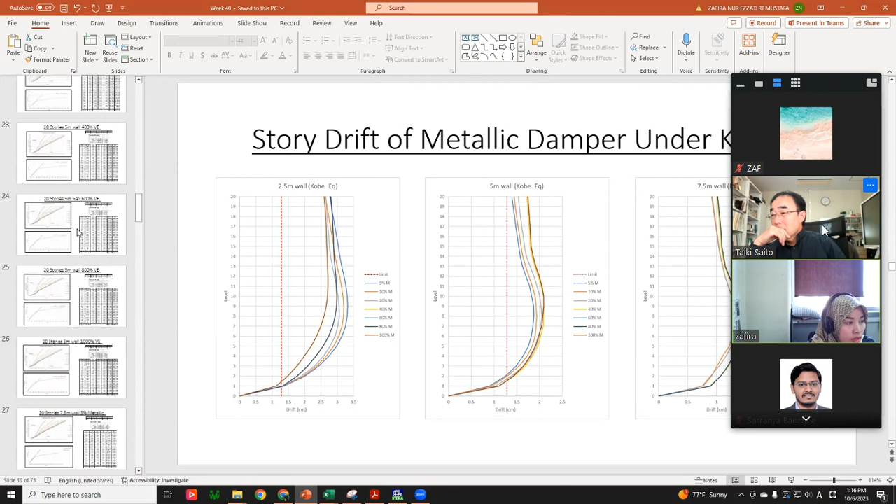Even comparing with the time history analysis here under Kobe, basically the 2.5 meter wall doesn't fit with the criteria we target. This is 2.5 meter, this is 5 meter, and this is 7.5 meter wall. The 5 meter is a moderate performance. Checking the 5 meter wall, for metallic damper it still doesn't fit the target, even at 100%, even at 5% metallic.

We can see the metallic doesn't dissipate much energy compared to viscoelastic. Viscoelastic can dissipate more energy, for example 20%, like 18%. But it also depends, because this is 20 stories, much more taller, and the length of the wall also influences the design. For a 20-story building, 7.5 meter is much better for the structure wall. With 7.5 meter wall and 20% viscoelastic, the energy starts from 10% for equivalent damping, and when we go to 40% it works much better.

Okay, could you show me 5% first? 5% under metallic, this one. This is the shorter wall.

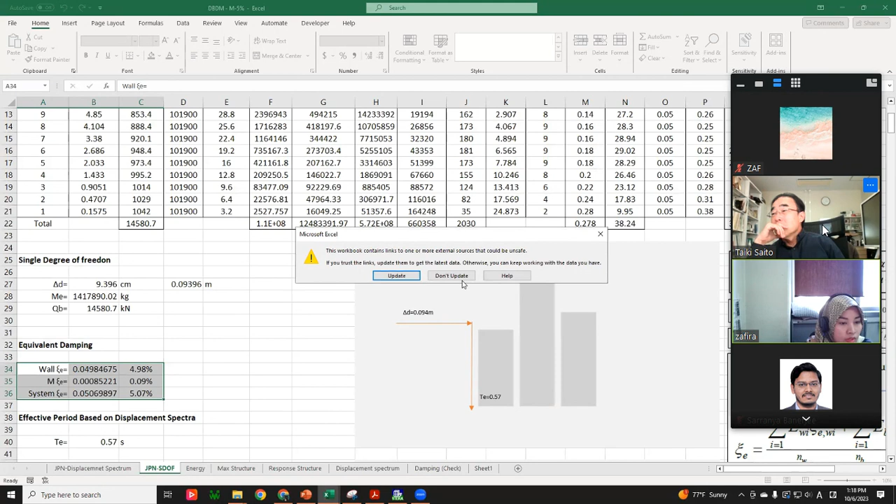Let me open the Excel for the 20 story case. From here we have the target displacement, and this is our equivalent damping. From the target displacement we can get our effective period based on the equivalent damping. Here is 5%, and our equivalent damping is around 0.57... equivalent damping is 5%. Yes, but this is the 5% line, so then we can get the effective period of 0.57 second, which is here.

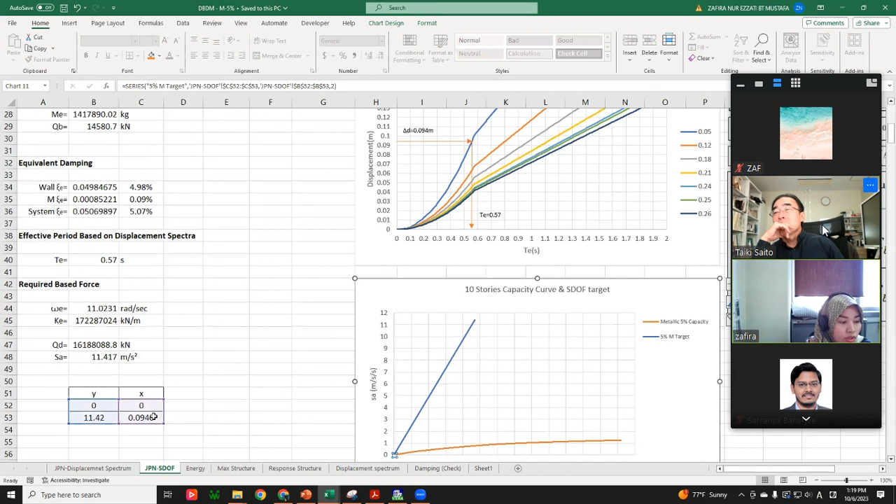It will automatically calculate for this line. This SD is our target displacement, and SA is our target acceleration. So if you want to go down this line, what you can do is increase damping, or increase capacity. Either of these two.

So this is a case where the coupling beam is very weak, only 5%. So it's a very weak coupling beam, and also a very weak wall, 2.5 meter length.

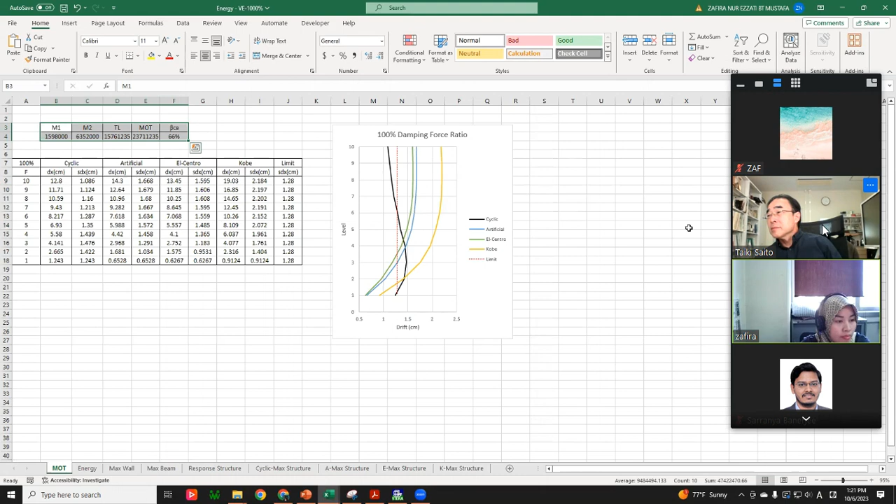How about 7.5 meter length? Any change in the line for 7.5 meter on the 5% metallic damper? The capacity is much more higher, because the wall is larger than before.

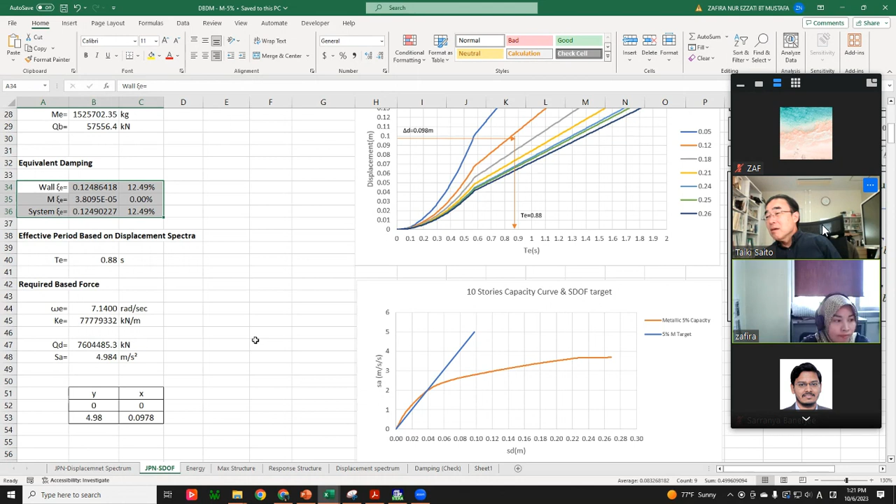Okay, and also damping is not 5%, damping is now 12%. But metallic is small, because if you can see here, the beam energy is very small compared to the wall. That's why the damping for the beam is big because it's 5% and it dissipates energy, but the coupling beam is very small and doesn't have enough capacity, and the total energy release is small compared to the wall. That's why the percentage of equivalent damping is small here.

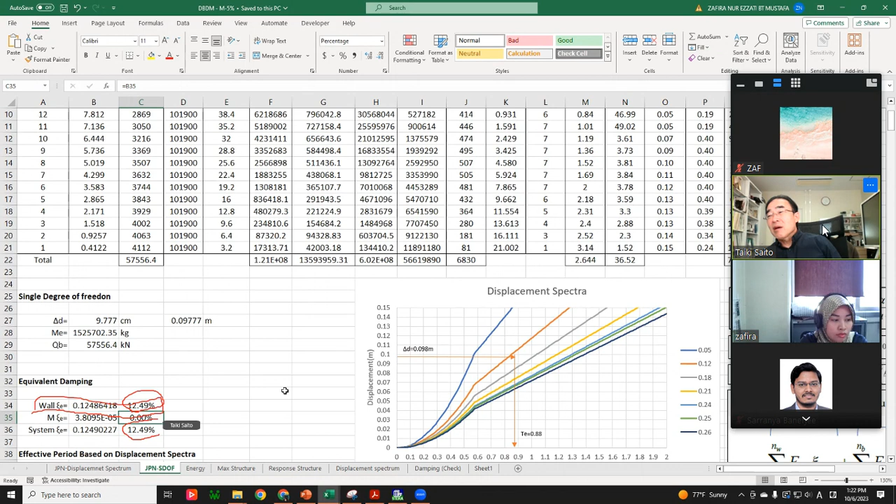But this damping is almost... so wall equivalent damping means the wall is getting damaged, right? Here is the ductility, sensei, it's still less than 5. The lower part is more than 1.

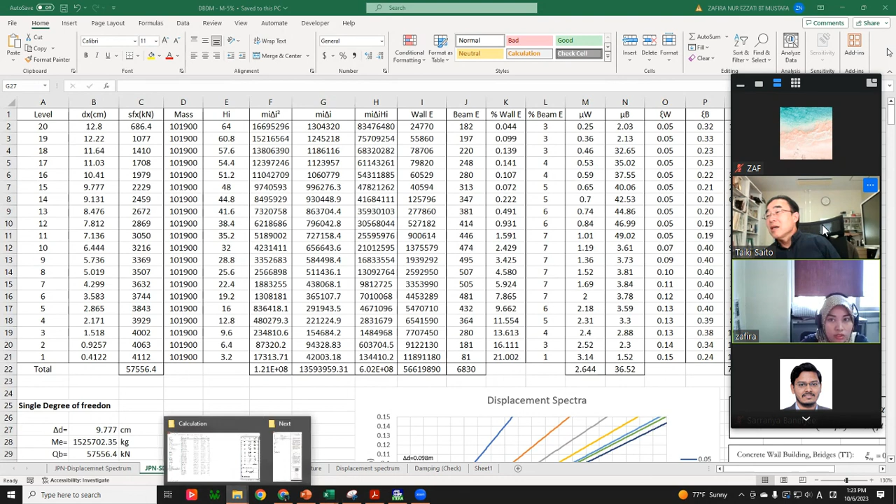Could you show me the 5 meter case? Okay, you can close this one. How much ductility factor for the column? For the wall.

So the ductility is almost no damage, but the coupling beam has so much damage, especially at the upper floor, the middle floor. But the total damping is only 5%, and a little bit for metallic.

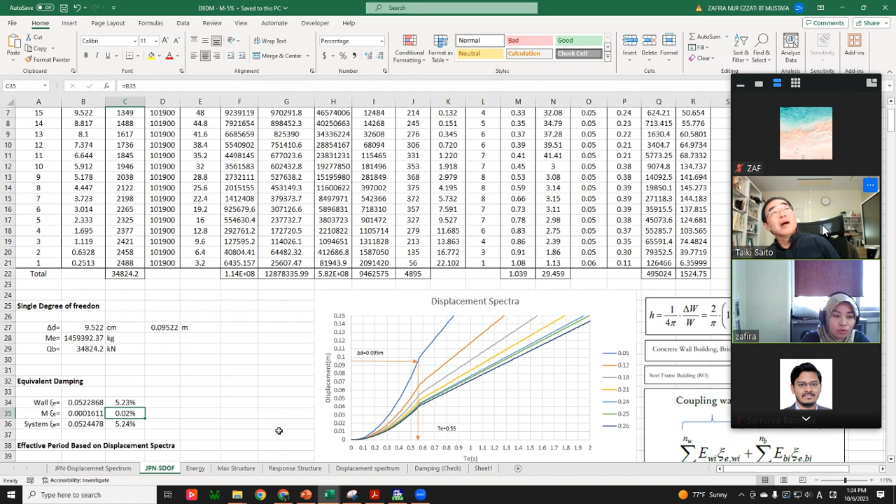Okay, so in this case, if you increase the capacity of metallic damper, maybe you can get a better result, right? Actually Sensei, for metallic damper we know that 30% is maximum for the metallic to yield. So if we plot more than 20%, for example this is 20%, it starts to yield. We can observe the degree of coupling is 82%.

When we increase from 40% until 100%, actually it becomes constant, Sensei, because the metallic doesn't yield, so the performance becomes constant, like 5%, 5%. But if we use viscoelastic, the performance is getting better and better from 200% until 1000%.

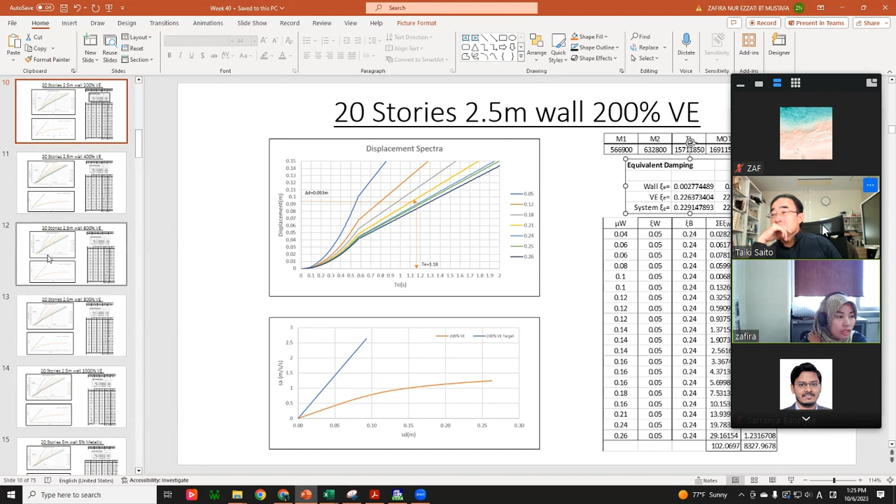If you see, for example we compare 200%, the damping here starts from 22%, and then 40% is a bit less, but the total equivalent damping is increasing.

So let's think about the design procedure. First you should check the coupling beam ratio, beta CB. If it's over than, for example, 80%, maybe you cannot use damper. And the damper is effective if the coupling beam ratio is... I don't know, in the range.

In the range? Yeah. Last time, in the previous paper we studied, we can see that this depends on the high rise of the building. So low rise to mid rise is around 25% to 40%. And for high rise, from my result, it's around this.

So we try to propose a design procedure for coupling beam. And you have many results, right? Yes.

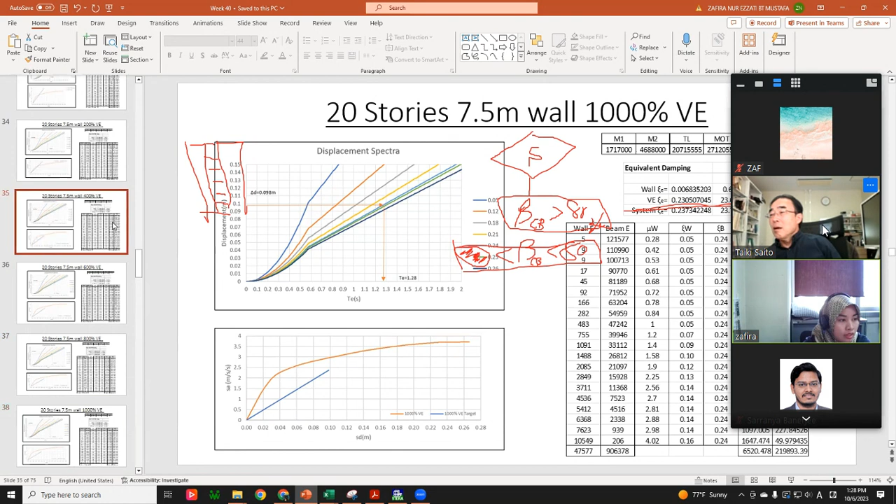So viscoelastic 400% is a good example, like 85%, 83%, this one. And this is 70, the good range is around 70% to 80%. So in case of metallic damper, this range is maybe 80%, and I don't know. But in case of viscous damper, maybe this range may change.

So could you summarize your result? Which case you succeed to design, and which case you cannot succeed? Okay, Sensei. And it is very close.

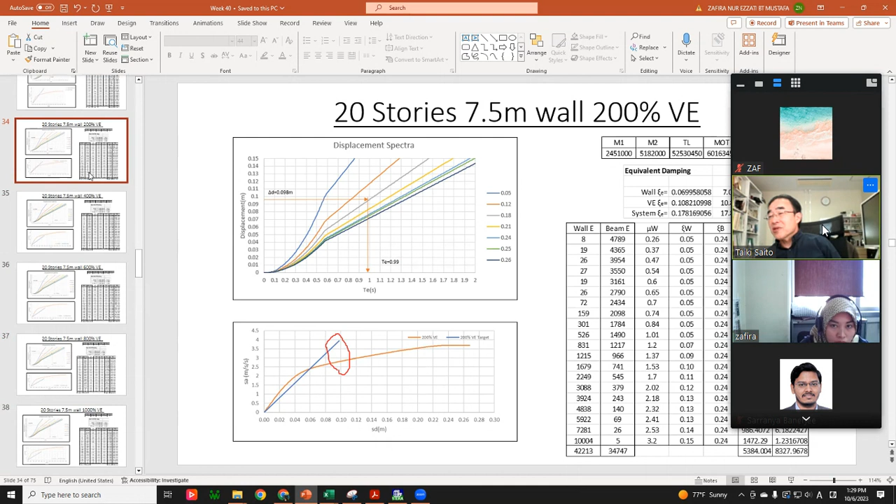Could you show me, for example, one slide before? So, for example, in this case, do you know how to modify your design to be much closer? One way is to increase the capacity, meaning we have to increase the wall length. No, we cannot touch wall length. Increase the capacity, you mean the viscoelastic percentage? So we can increase the damping.

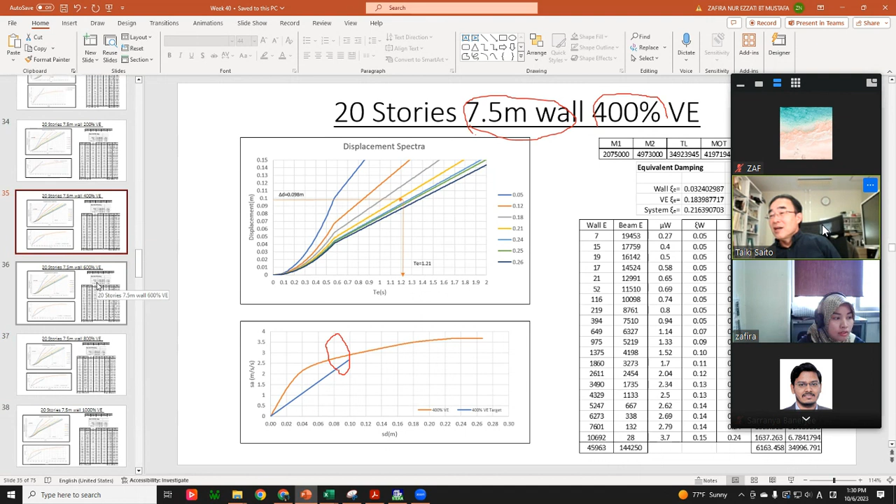Do you have a result of 400%? For example, this is 400 Sensei, this one, it's 400. Okay. How about 300? 300 I don't have, but I have 600. 400 is below the capacity curve, and go back, 200% is over.

So it means 300% might match, right? So it means you can succeed to design by using displacement-based method. Okay Sensei. And this is a capacity, coupling ratio is very large. So if you use viscoelastic damper, you can design even when the coupling ratio is very high.

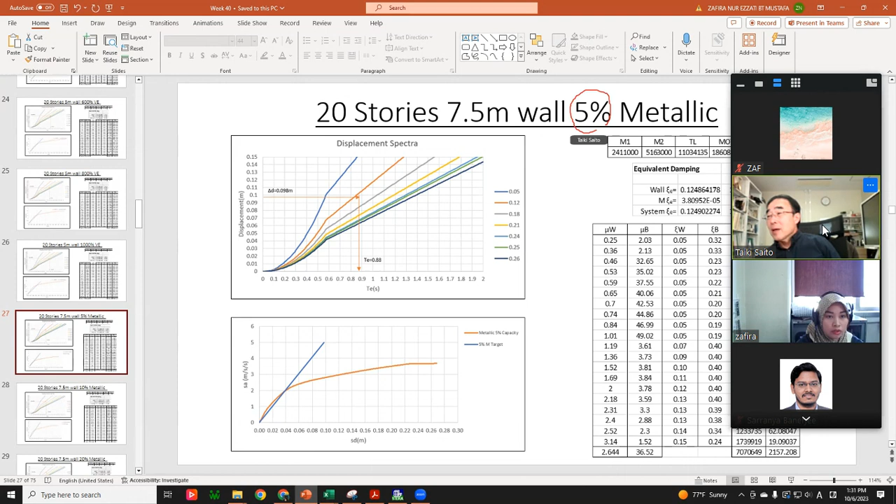Okay, let's see, could you go back to metallic damper again? Which length, Sensei? 5 meter? 7.5. This is 7.5, and changing this percentage. Okay, 5%, this is 10%, and this is 20%.

So these two lines don't match each other. Yes, this is 5, 10, 20. And next one? This one is 40%. Still there is a difference. The energy is very small, Sensei, if we see this one.

Compared to wall, it's very small for the metallic damper. So there is a kind of dilemma: if you reduce the capacity of metallic damper, it yields very fast, but energy dissipation, this area, may not be so large. But if you increase the capacity, yielding doesn't happen so often. Yes, only until 30% for metallic damper.

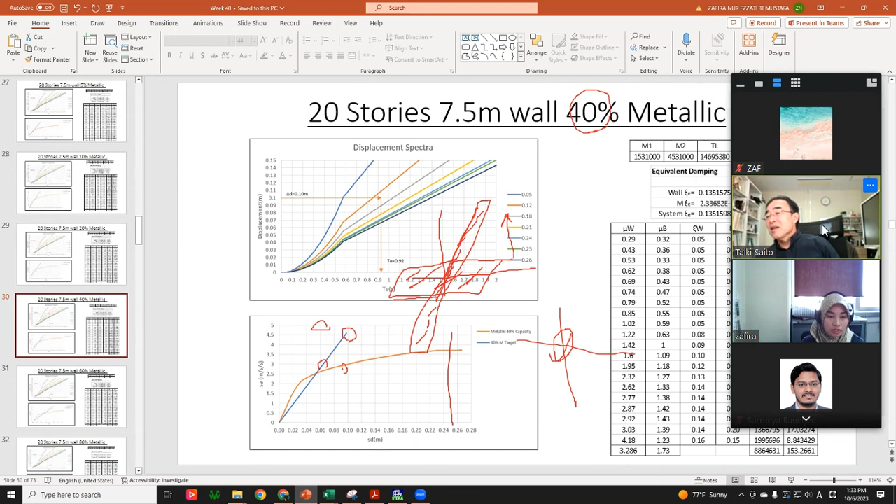So it means energy is also small. So even if you control the capacity, energy dissipation of the coupling beam doesn't increase so much. This is a kind of limitation of the metallic damper. And the viscoelastic damper, even at small deformation, dissipates energy. And if you increase the capacity, it will also increase damping. Right? So it's easy to control. You can increase capacity and damping both together at the same time. Yes, I see. Okay, it makes sense.

Okay, did you try the hybrid case also? Hybrid case I haven't tried yet, sensei. I only tried metallic and viscoelastic.

So the hybrid case is necessary if you use the viscoelastic damper and increase damping force. Sometimes this damping force is too much. With a beam having viscoelastic damper in the middle, if this damping force is too large, other parts of the beam will go nonlinear, or the supporting connection might be damaged.

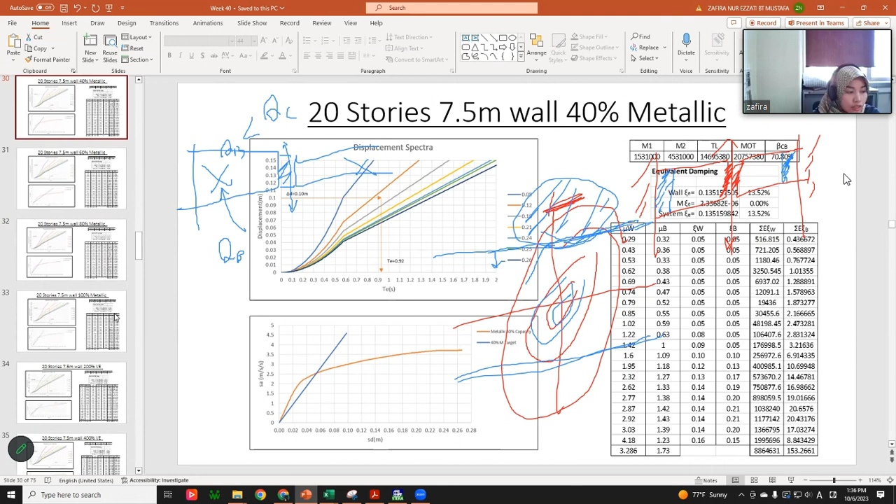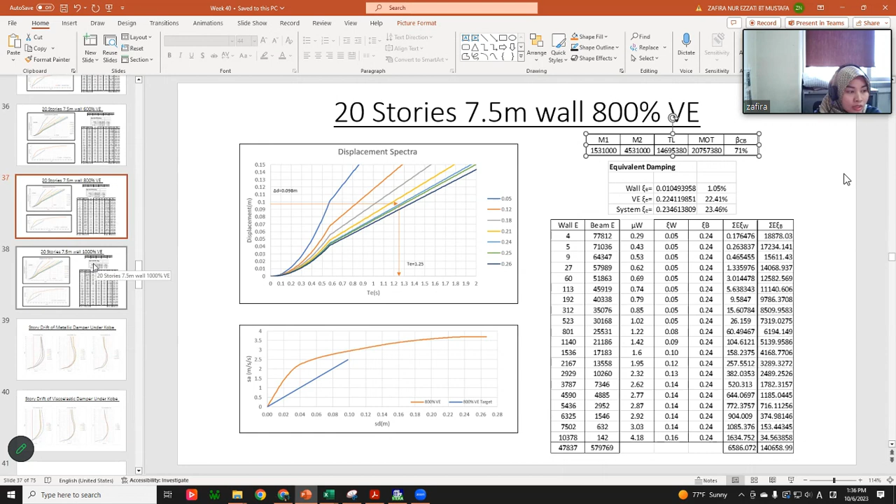Actually, when I noticed, it's between 800% and 1000%. So we can see the capacity for this box doesn't change much, but the degree of coupling — a good range for degree of coupling is about 70%. But when we increase the capacity more, like reaching 10 times, the degree of coupling becomes bigger.

So in this case, how much is the damping force? About 23%. No, this is a damping coefficient — I'm talking about the shear force of the damper.

It's about 29,000 kilonewton. Is it less than the capacity of the beam? More than capacity — the 100% is 2,900, sensei. So this one is like 10 times higher.

But you also did stress and pushover analysis? Yes, sensei, by this 1,000%. But for viscoelastic it cannot use pushover, so we have to use a formula to calculate the damping and energy. But in the next slide you have a result of time history analysis.

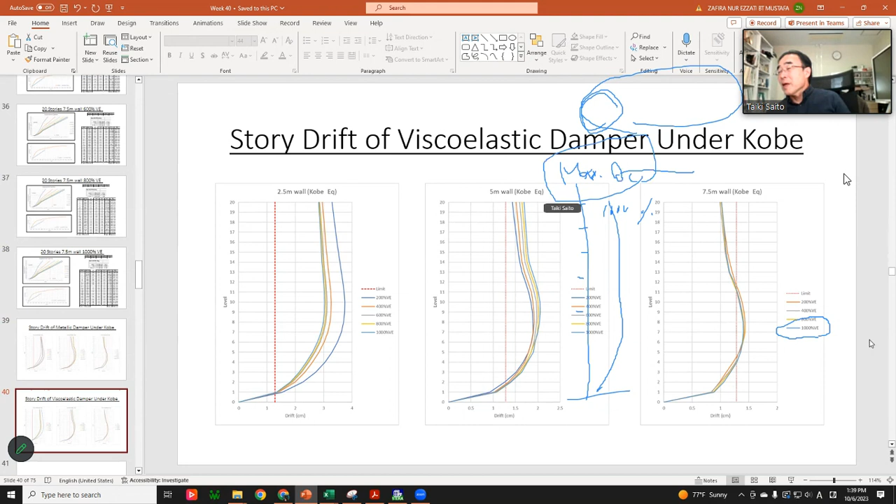Maximum shear force of the damper, and compare it with the shear force capacity of the beam. I have a question: even if you design it 10 times higher than the capacity of the beam, does the damper not have some effect?

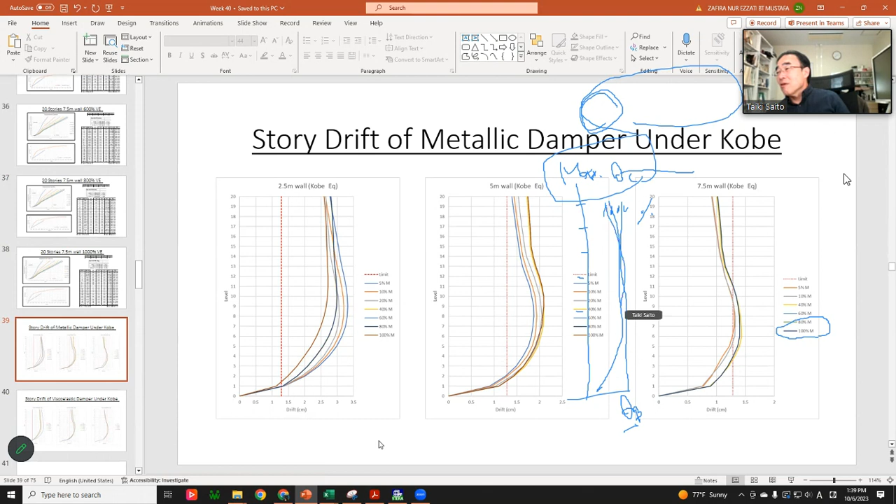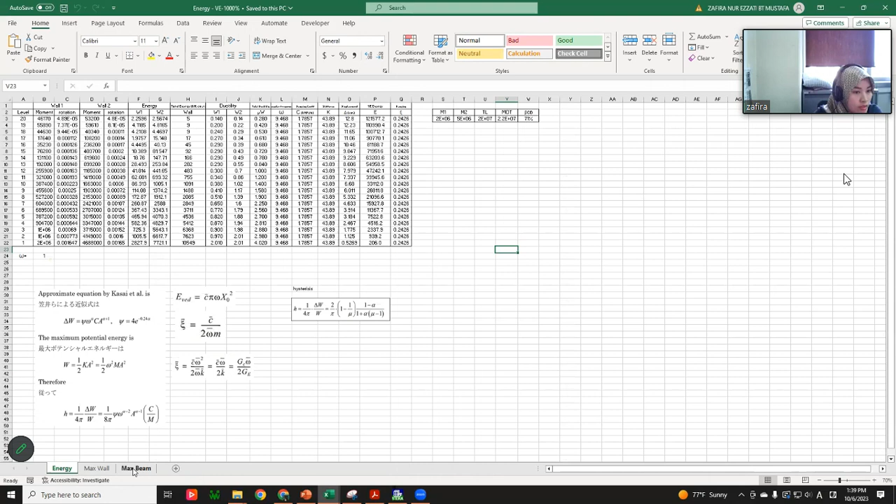If we use, for example, this viscoelastic one, do you have the result of max damper? This one is viscoelastic and inside has max beam, so the shear is this one. And this displacement is 0 because this is a pushover.

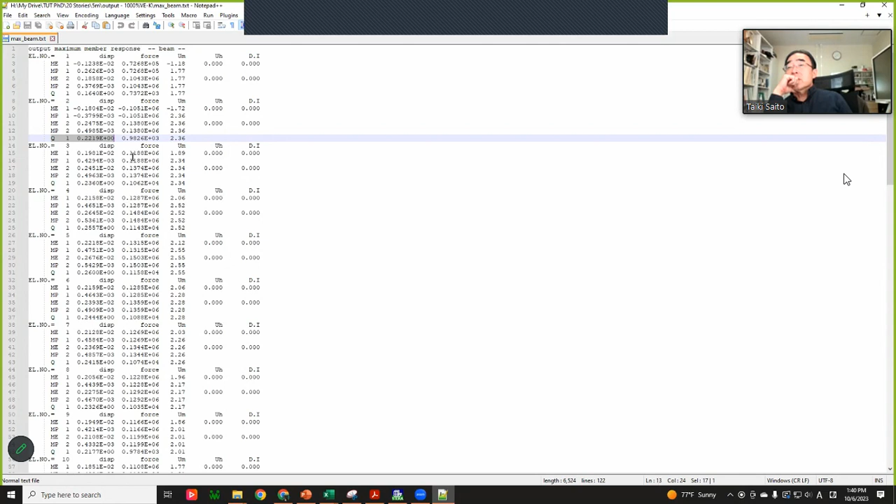No, I'm asking about the result of time history. Time history — max damper, max beam. Okay, max max is beam. So this is the Q. Is this the shear force of the damper? This one is shear force, let's say Q, this is the force.

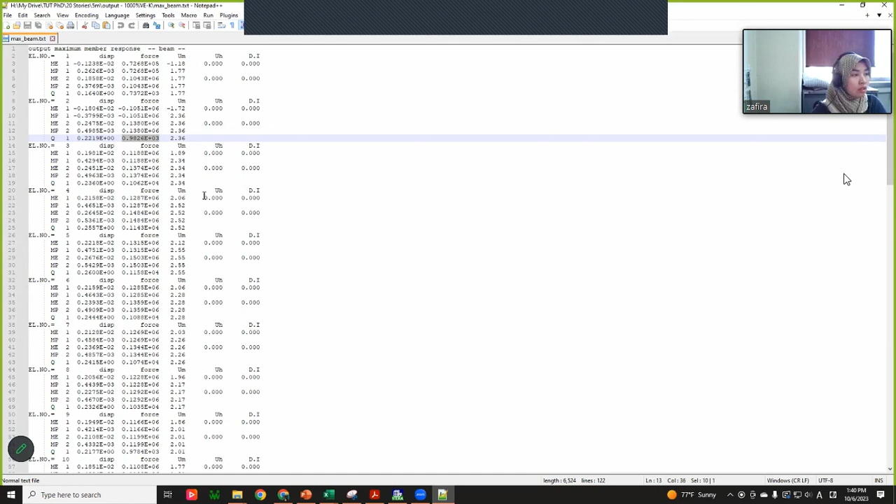And I copy — oh, wait a moment. So this is the force, and this is the displacement.

Um 1.77 — what does that mean? This is ductility, sensei. Okay. But this is the viscoelastic damper. Yes, sensei.

Okay, could you show me the data beam? Here. It doesn't show here, sensei, because this is for rebar. It doesn't show the capacity here because this is for rebar. This is data beam for viscoelastic.

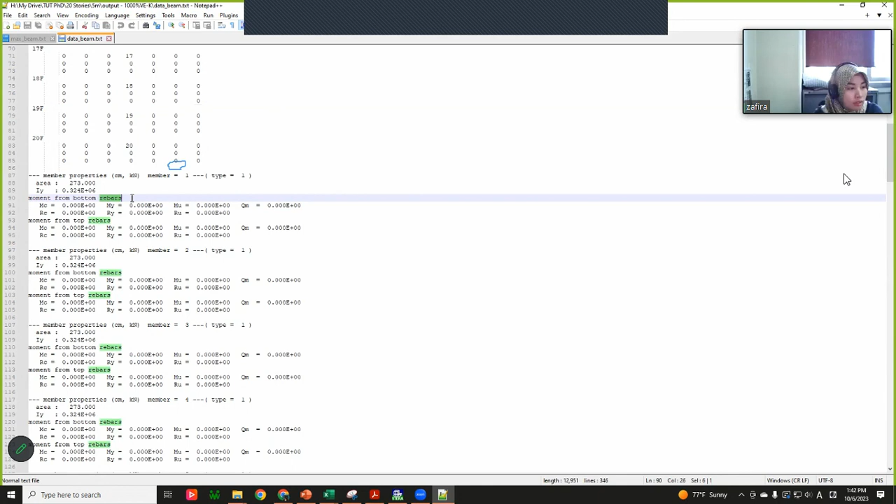Why is there no data beam? This is rebar. Because it's a steel beam, right? Because it's not reinforced concrete. Yes, it's not reinforced concrete.

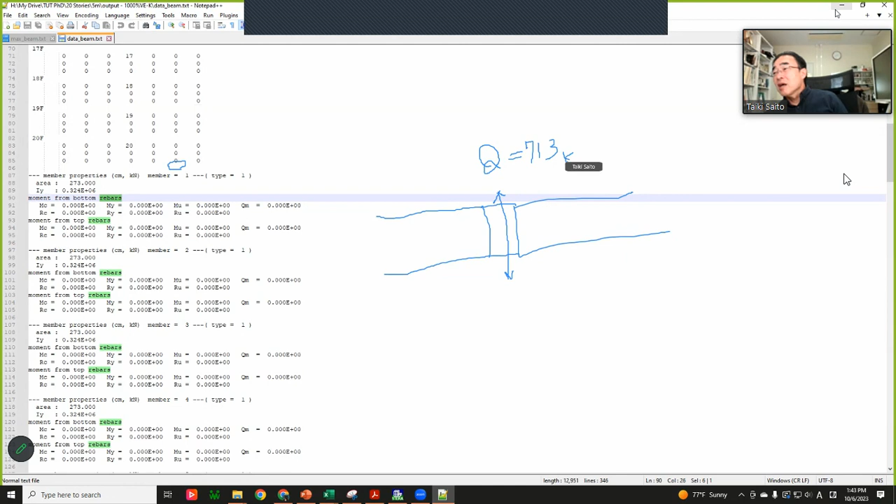Okay, so what I worry about is you have a steel beam with viscoelastic damper in the middle, right? And the shear force of this viscoelastic damper, from max beam, it is about 713 kilonewton, right? So I want to know if the steel beam is okay or not, elastic or not. You don't know. Can we check the ductility based on ductility sensor?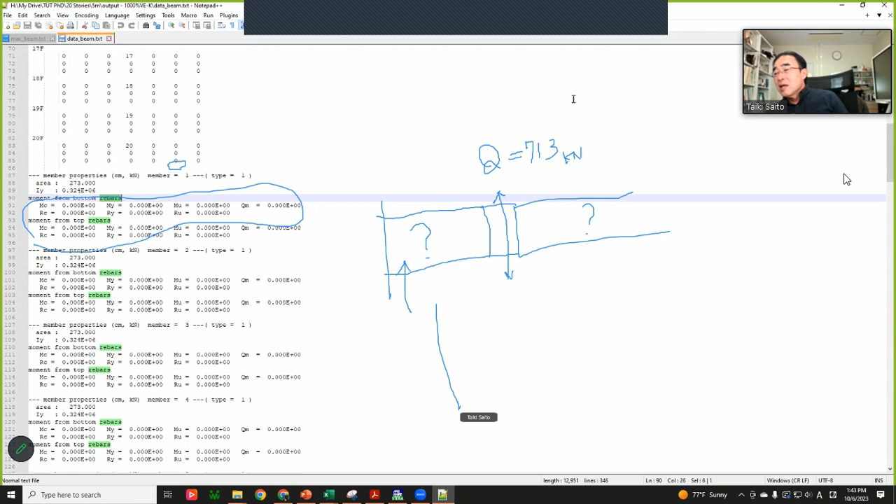Okay, I will check STERA 3D and try to change this part. Yeah, because this beam has — well, not cracking, but at least it has a yielding moment, right? And if you double the yield moment and divide by the length of the beam, you can get the capacity of the steel beam. And you can compare with this one and this one. If this one is larger, it means this steel beam may be yielding, may have damage.

Okay, I will change this stress rigidity so you can get the MY. Sensei, for the model, we actually use direct input, right? So we have the metallic spring and also the middle is viscoelastic spring. It's a direct beam. Yes.

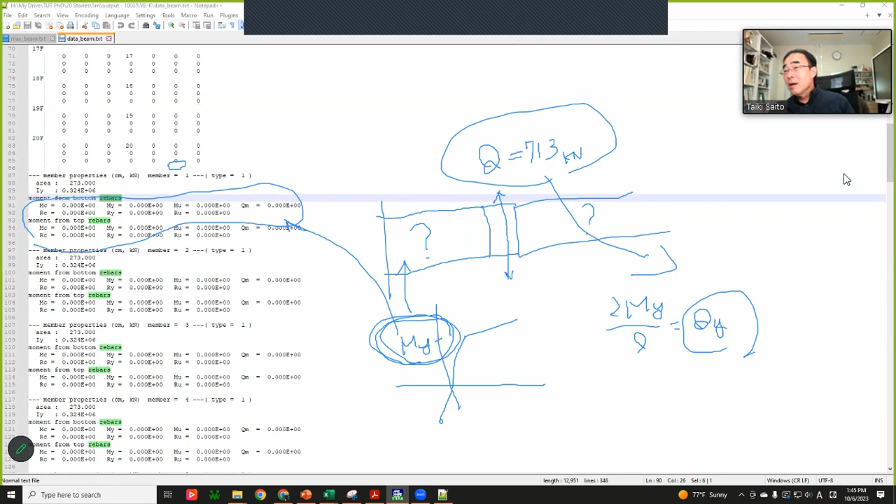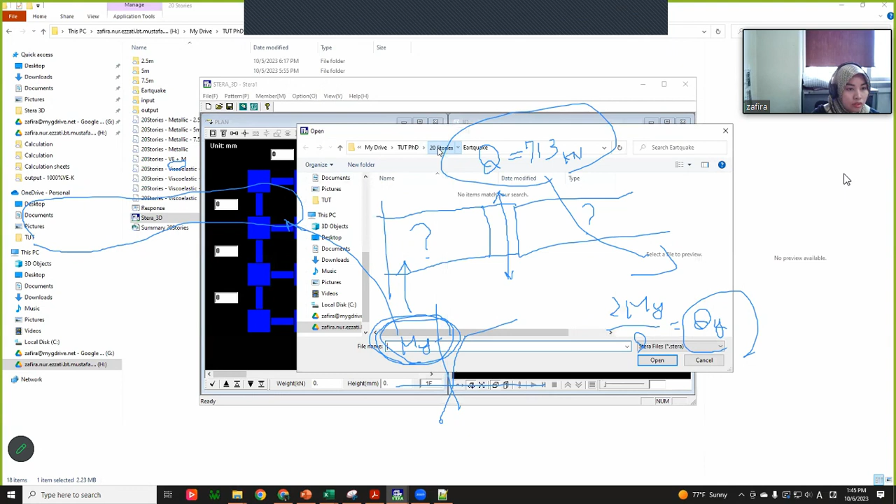Could you show me the STERA program? I will open it. So, viscoelastic. For viscoelastic and even metallic, we use the direct method because we want to use a single spring.

Could you show me the property of this one? This is 1, and this is the capacity of the metallic beam. Okay, you have a capacity here. Yes, 2,900.

Multiply by 2 and divide by how much length? Length of the beam is 3 meters. So it's almost 1,000... 1.9, so 2,000. And your shear force is 730 or something. Yes, so it's much less than the capacity.

Okay. So even 1,000% of viscoelastic damper. Why do you call this one 1,000%? Actually, I just want to check the performance, which varies capacity for the viscoelastic, and I want to check at which percentage it performs better.

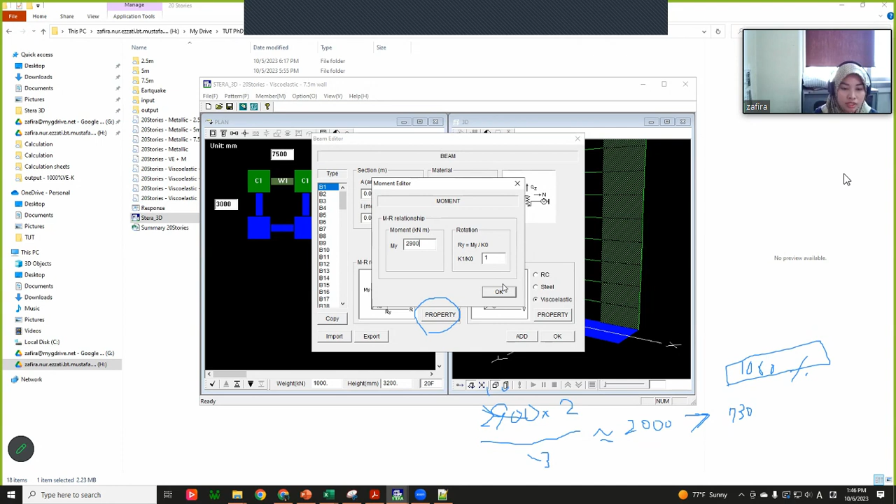And 100% means 100% is same as here, 2,900 kilonewton. This is the capacity for 100 kilonewton, 100%.

Let me open this one. So this one is for viscoelastic. So this is 1,000, so 100% is 2,900. Same as metallic. So at metallic, 100% is 2,900 kilonewton.

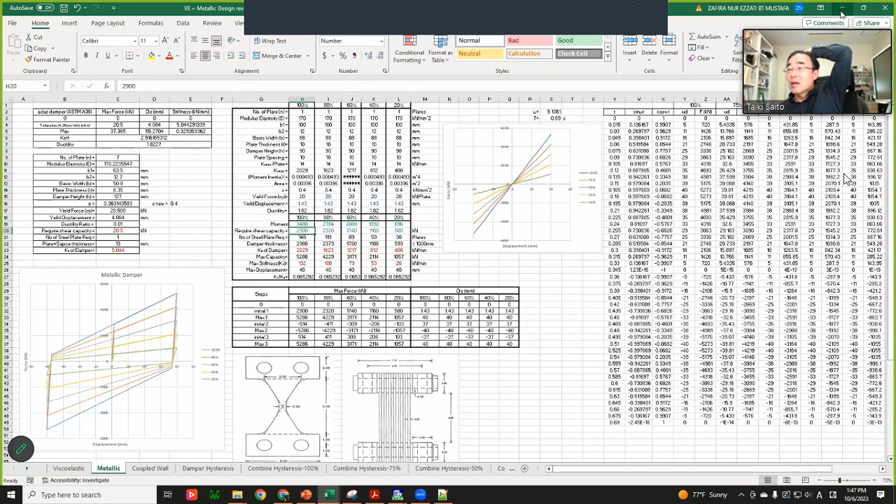So you assume the viscoelastic damper has this kind of shape, and how much amplitude did you use when you designed it? How did you decide this 50... 60? How did you decide 60? 60 based on target displacement for viscoelastic.

Target displacement of viscoelastic. How did you decide the target displacement? And also, how did you decide omega? Omega is based on the period of the building.

Period of the building. Okay, so what is the 60 then? 60 is the target displacement for viscoelastic, so how much the maximum damper can displace. But how did you decide 60? 60 centimeter, millimeter? Millimeter.

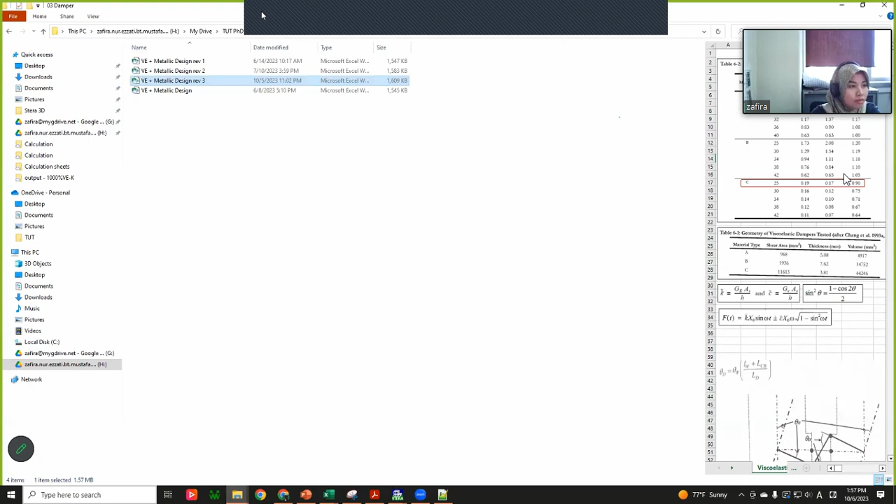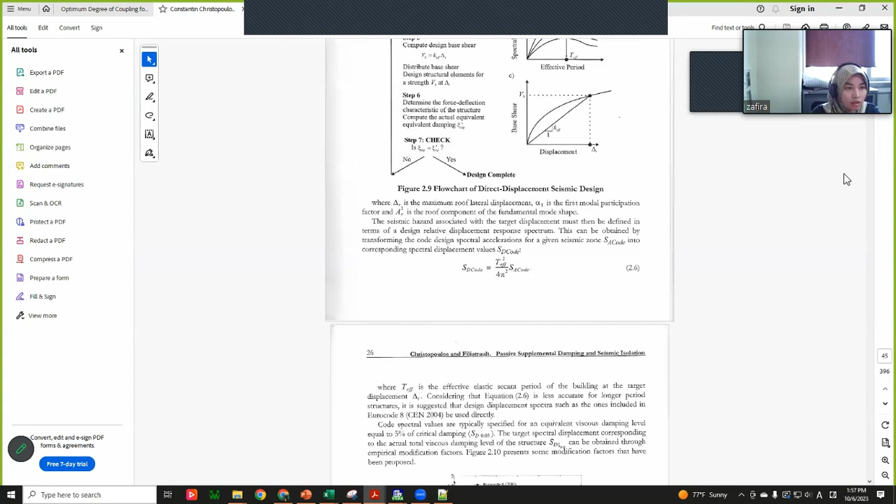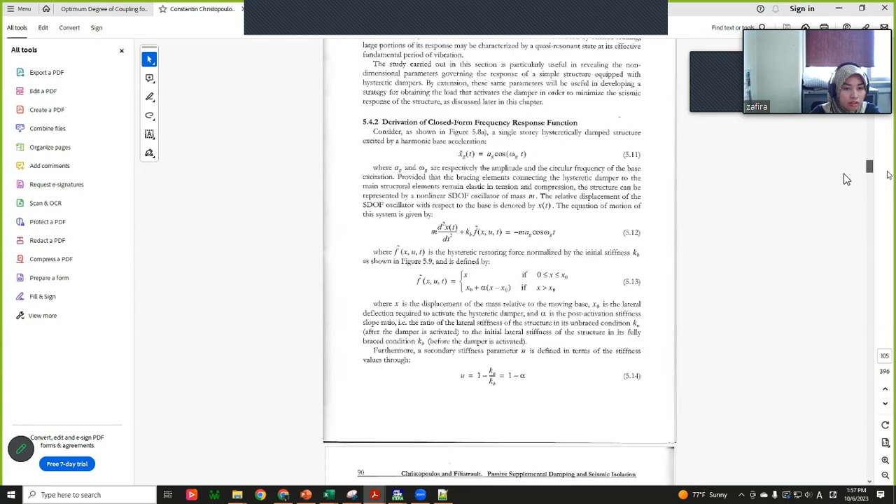Let's check this. There must be some specification of the damper product. In the Christopoulos paper, it only discusses the viscoelastic material. It doesn't discuss the damper itself specifically, because the damper they use is the viscoelastic material. For example, this one, and the one they use is different from what we use. They only study the viscoelastic material.

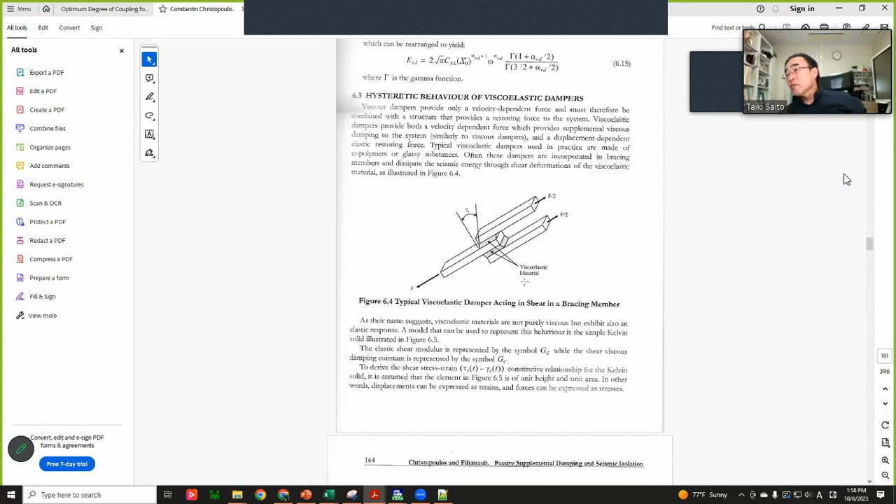So you assume this damper can deform 60 millimeters? Yes. Are you sure? Yes. What kind of viscoelastic material? How did you decide the C value?

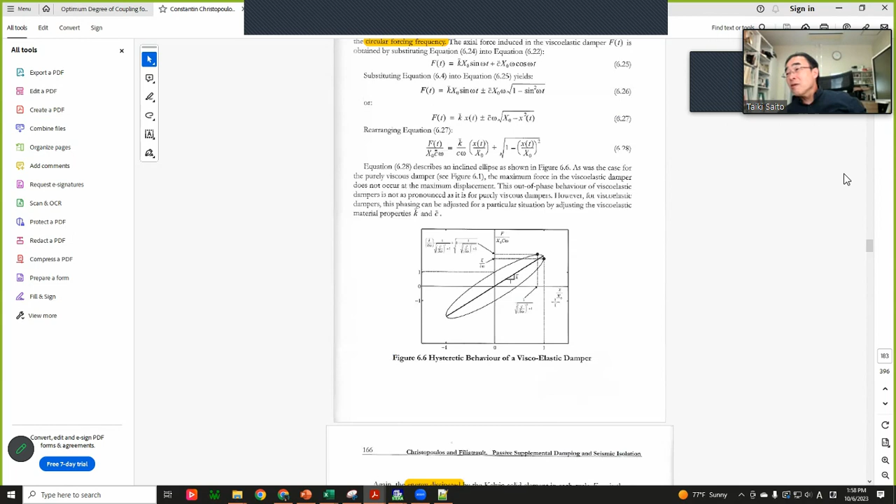The C value is based on this formula, from a previous paper. They have 3 different materials. So this is the property of the viscoelastic material. So how much shear deformation can it deform?

So the force is calculated by this formula. So when we have the material values GE and GC, including omega, we can calculate K and C. And then from here, we can substitute into this formula to get the force.

But if you deform the damper, it will eventually break, right? Yes, that's why we have a limited displacement. So where is the... I mean, in the catalog of my product, there must be a limited deformation. In this paper, Sensei, it doesn't give a limited displacement. They only give this. But you cannot put any number here.

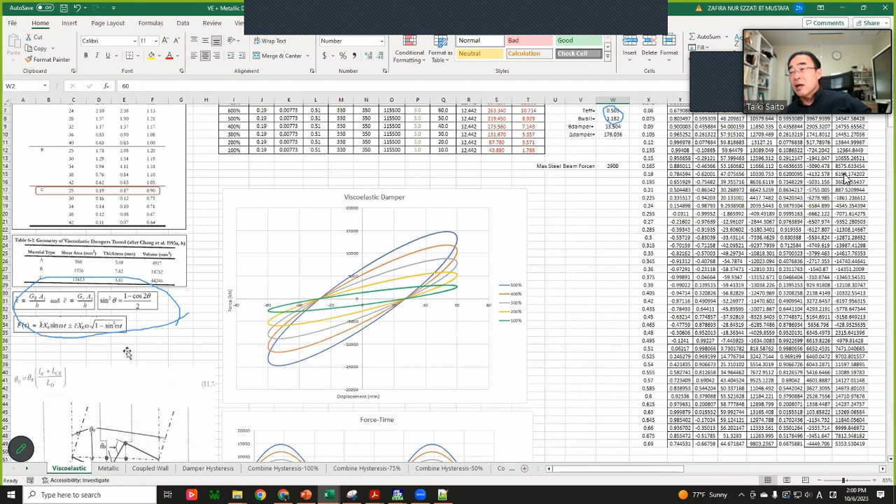Can we use the existing catalog with the maximum displacement and apply it here? It depends on the product. Yes, Sensei, but previously, even from the company we saw, they only have a viscoelastic wall. But you have this value, and you have a picture of this material, right? This damper—okay, I will check again, Sensei. This paper.

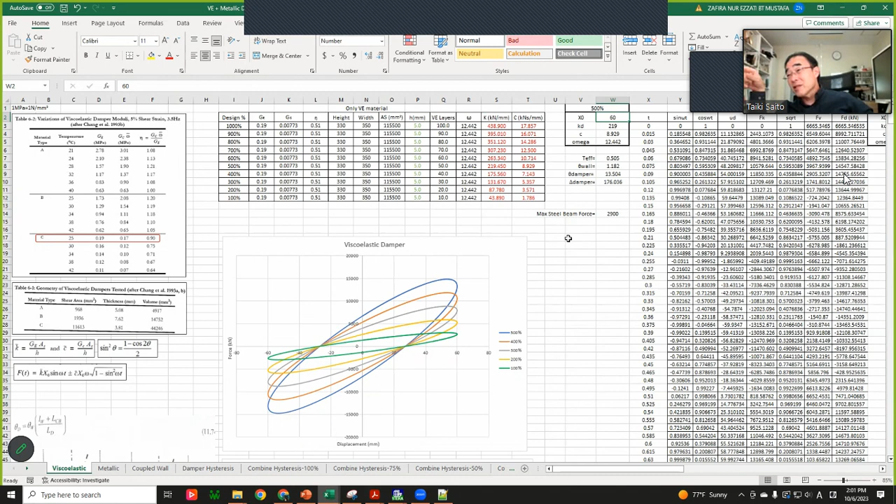Okay, so we must check one by one without any... let's say, without any evidence. We must decide based on the evidence. Okay? So if you put 60, you must give me the evidence why this value is 60. Okay, Sensei.

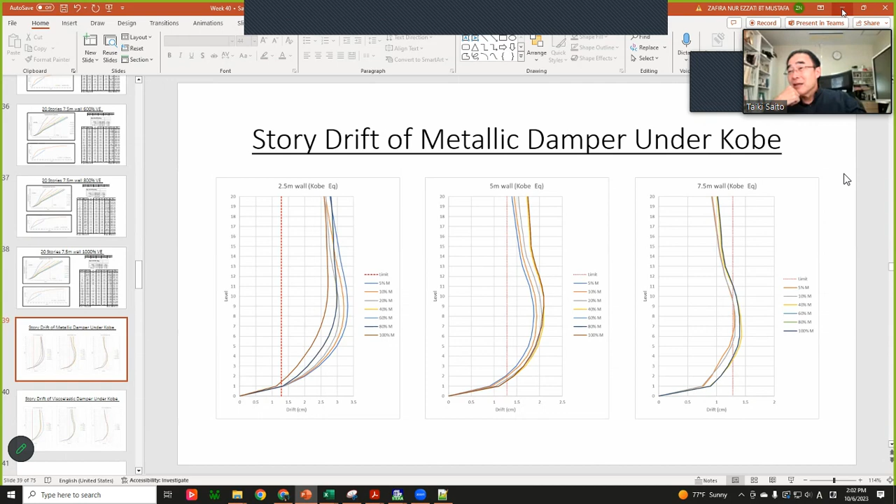So for now, we only have 3 different stories: 10 story, 20 story, and 15 story. Now Sarah is doing 15 story. Dr., I know you did many analyses. If you make a mistake in the beginning, you must do everything again. Okay, Sensei, the starting point is most important. Right—how to decide the damper property and what kind of viscoelastic damper. It's most important. I will find the missing puzzle and show it to you.

The procedure is okay, but the starting point is a little bit vague. Okay, Sensei. Okay, so who is next? I think it's me, Sarah-san. Okay.

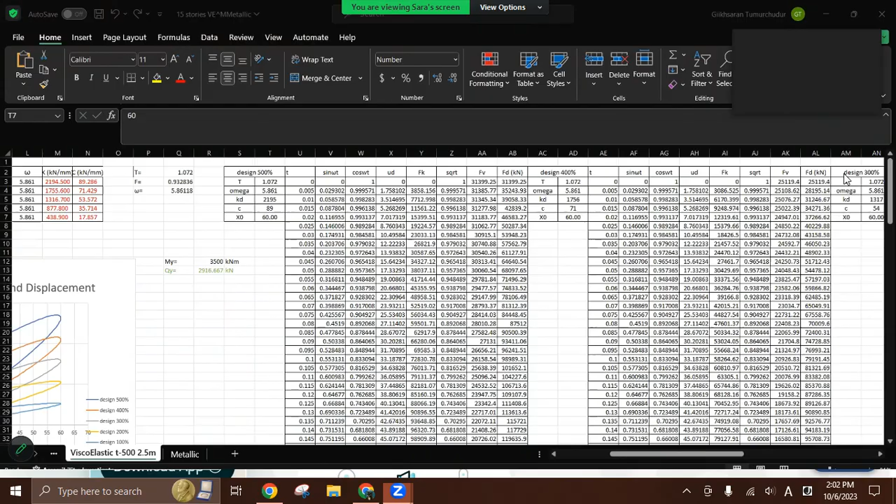And for 5 meter, this is... no, for 7.5 meter, here. Okay, so this is the same result Zafira-san showed me. Yes.

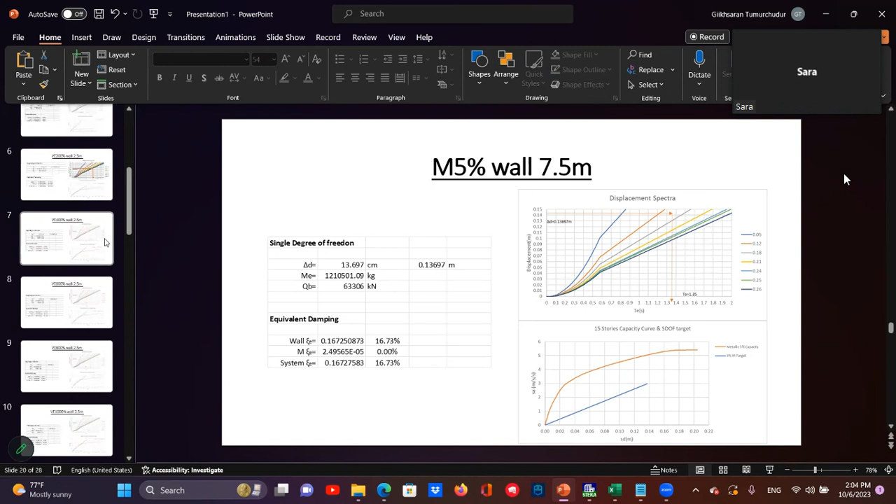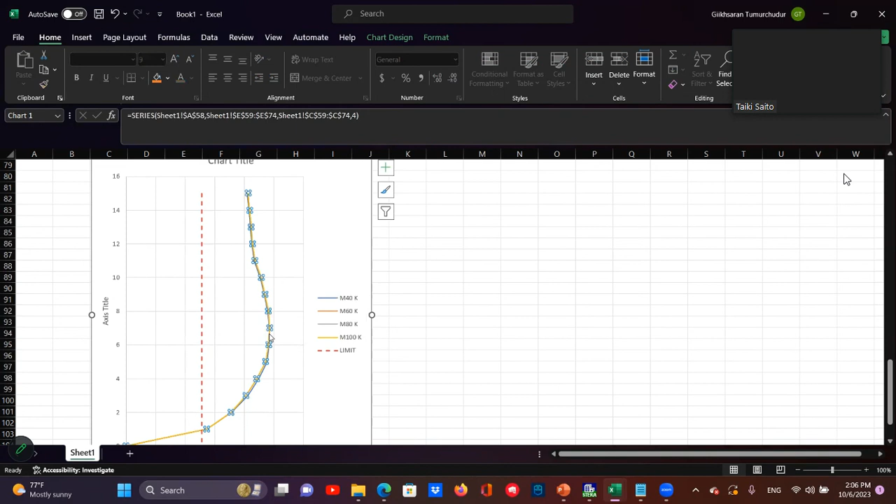Sensei, can you hear me? Yeah. So what is your summary? Uh, yeah, that's it. But I want to check the time history. In here, this is under the copy of wall 2.5 meter, but almost the same. Yeah, because the metallic damper is not yielding. So if you change the capacity to 40, 60, 80, 100, the damper is not yielding, so all results are the same.

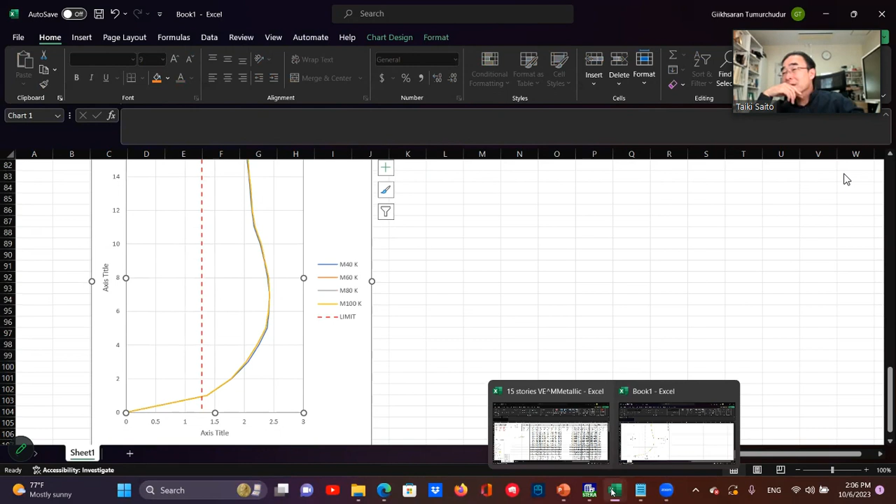Did you also do this for other walls, Sarah-san? Only for 2.5, for the time history analysis. Yes. You should compare with other walls too. You cannot only compare with one wall.

So maybe later you can compare with other different walls, so you can see the different performance. After you try many analyses, finally you must summarize and make some story or design procedure.

Right now you did many analyses, but we must propose a design procedure so that the designer doesn't need to do many analyses. If the designer follows the procedure directly, he can get a good design.

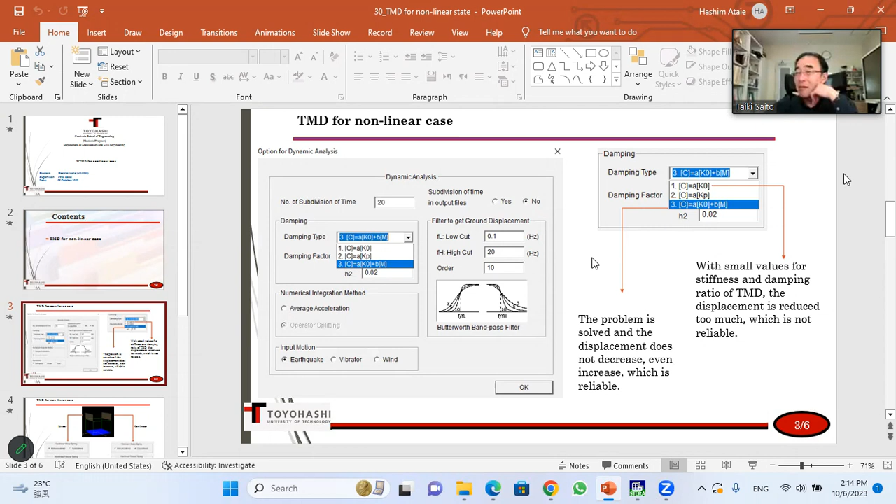Yeah, I don't know the reason also. Interesting. So we should select number 3, the damping type? Yes, Sensei, it is number 3. Okay, yes, thank you, Saranya-san.

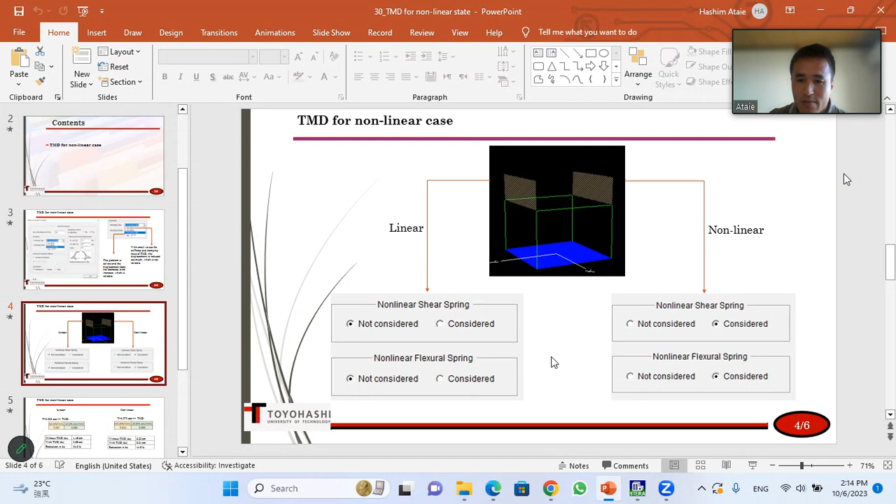And I just started nonlinear analysis with this model, one story. I analyzed linear and nonlinear, changing this to shear spring and flexural spring. The time period of linear and nonlinear is different. In this case, linear is a little higher than nonlinear, so the value for stiffness of damping is also smaller.

When I compared the result, installing a TMD decreases the displacement by 24%, but in the nonlinear case it decreases about 44%. But obviously the displacements are higher because the model goes into the nonlinear range. So I don't know if it is true for other models, but it needs a lot of analysis for other models - I'm just looking to find a very nice, good arrangement of multiple TMDs to control the nonlinearity of the model also, Sensei.

And that's all. So nonlinear means the main building goes nonlinear? Yes, Sensei, well it depends on the input earthquake. The input is El Centro here, the same, Sensei, for both linear and nonlinear.

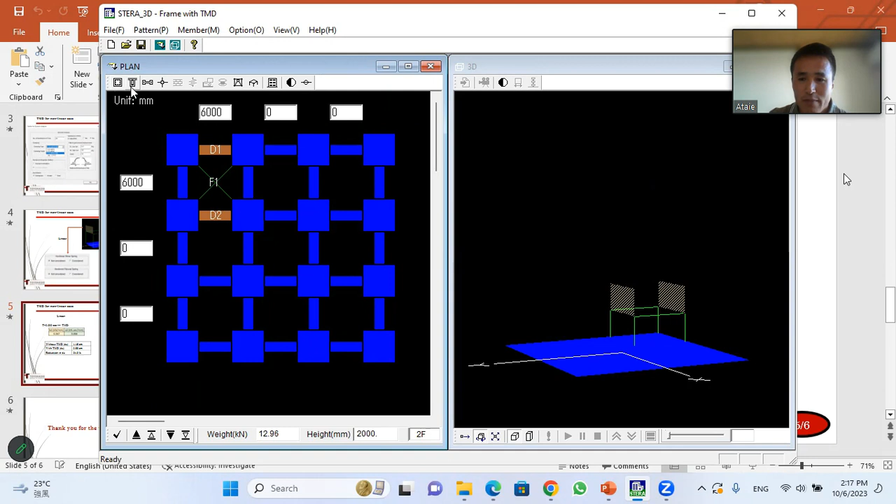This gave me the STERA, Sensei. I only designed a column and a beam with these properties. So when I analyzed without TMD, the period was given here, but it's an elastic period. But when we change, Sensei, the non-linearity and linearity, again that T also changes. It doesn't depend, why it's changed.

Okay. You misunderstand. Okay, sensei. Could you close this window? Okay. No, show me the slide. Yes, sensei.

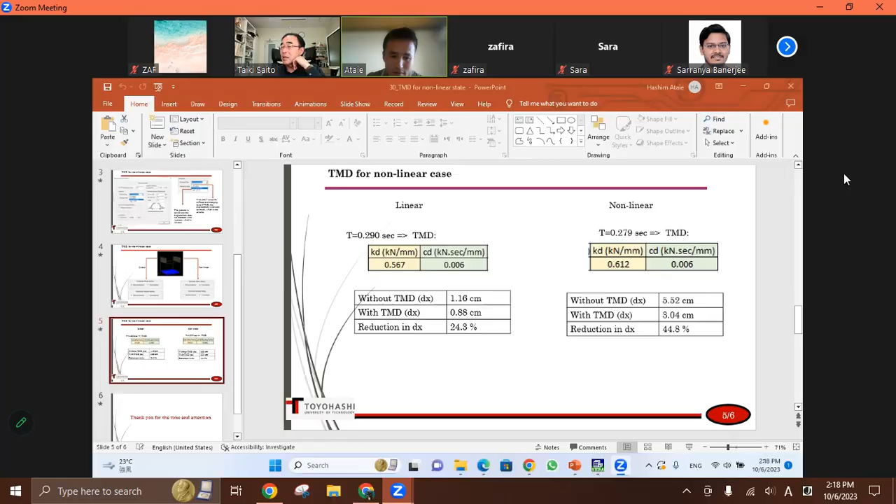So if you design TMD... I cannot draw. Why? Okay, now I can. So, how to say, the beam with elastic, and this is a beam with nonlinear spring.

This one you neglect nonlinear spring, so it's completely elastic. This one is nonlinear spring, but has an elastic range and a nonlinear range.

If you calculate the period, they calculate it using this elastic stiffness, so this is this value. In linear case, the period is... no, this one is longer, this one is shorter.

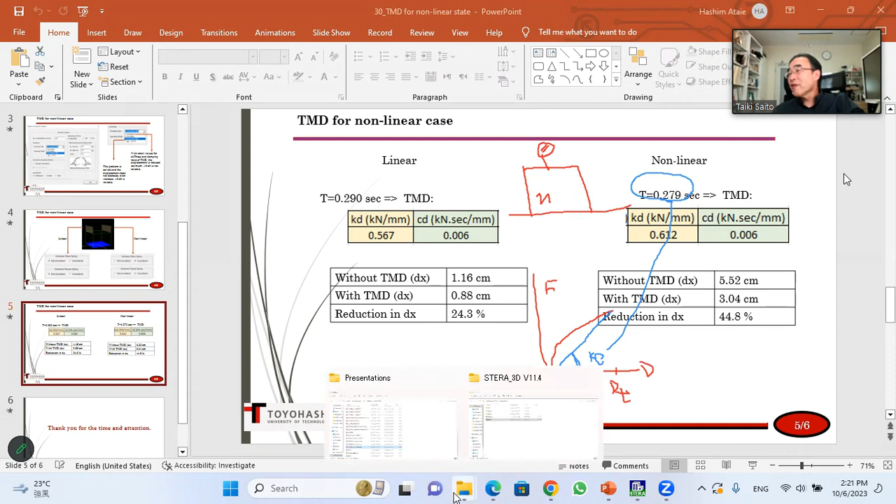Sensei, may I share another? Sorry, sensei, just a moment.

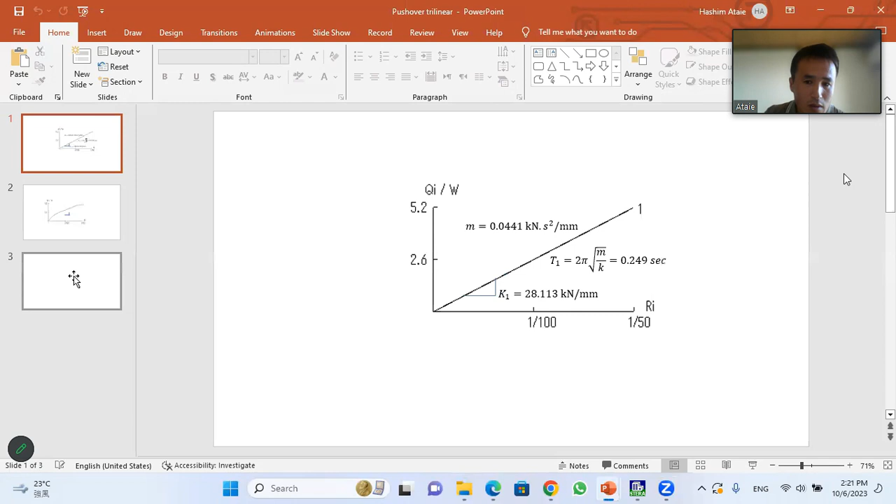Since I tried this for just one story... very good. So maybe, but for multi-story I don't know. I use this value QI, which is the shear force of the story over the weight of the building, and this is delta, the displacement of the top story over the height of the building. If you draw the capacity spectrum by pushover, you can get the same kind of, very similar, curve.

And I was thinking to design 3 TMDs for each of this, and then analyze what happens. Yeah, it makes sense. Okay, please try this one.

Okay sensei, thank you. So even for multi-story, if you do pushover by STERA, you can get a capacity curve, equivalent to 1 degree of freedom, something like this. And you can get the equivalent period. So if you want to control the first mode, you can use the capacity curve.

And sensei, I have a question. In this case, it is released in all the X direction. But in some cases, if I consider releasing all the X direction freedoms, then this beam which is under the TMD will fail very soon.

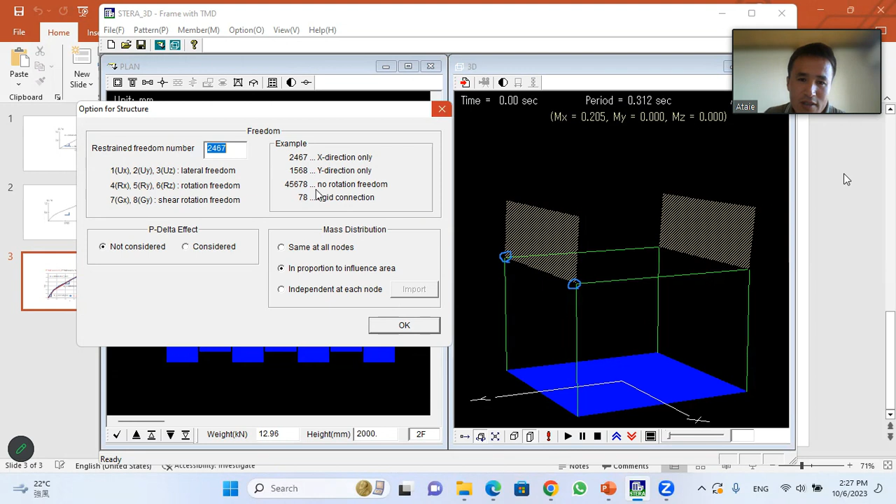In this model it's okay, sensei. But if we consider it like this, there is no beam, this joint will fail very soon, sensei. Yeah, of course, there is no column. Yeah, because of that. I wanted to consider only...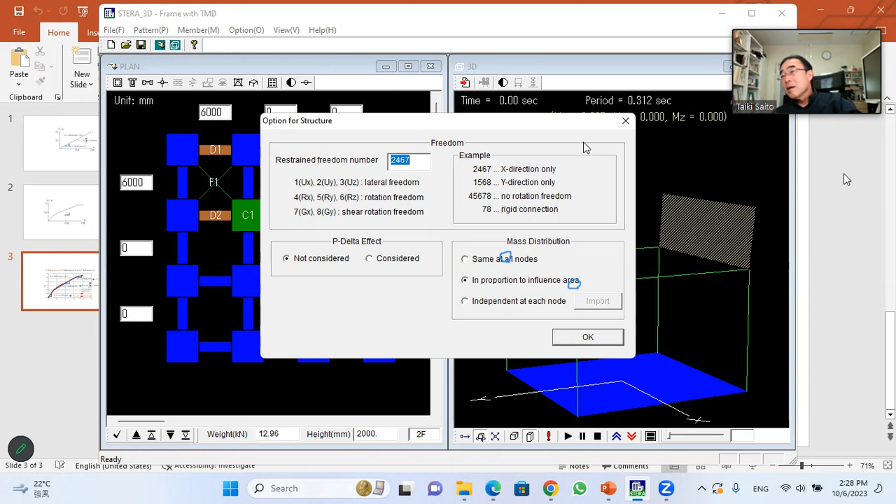But if you... no, in this case you should... Sorry, sensei, maybe I should work only on the top, not in the middle, at first. Okay, so in this case you should use top story as rigid floor.

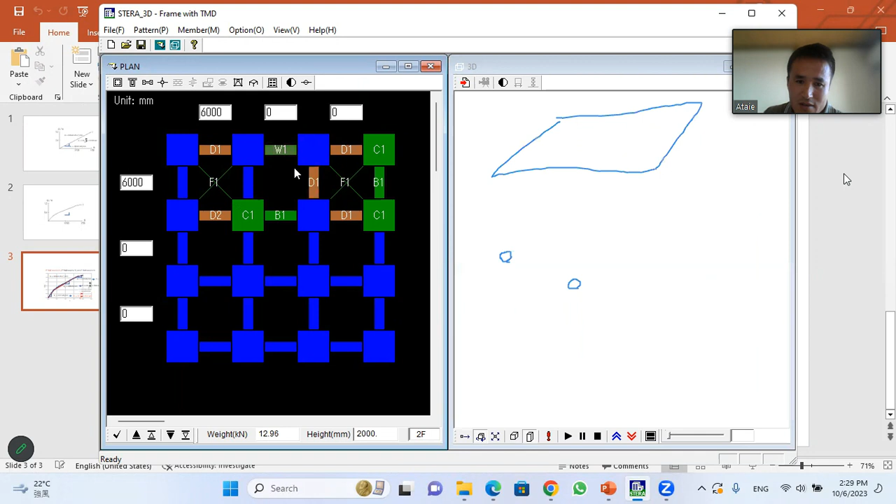Yes, sensei, and for example I can install many TMDs on the top like this. For example, here there are frames, like this sensei, all the nodes have columns, and I install, for example, 2 TMDs. If it is wider, I can install 3 to 4 TMDs also, sensei.

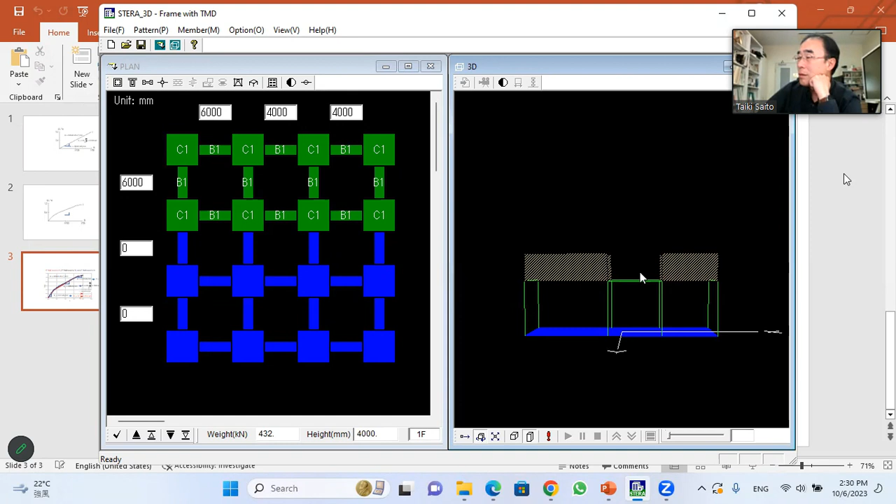In this case, the weight of both TMDs will transfer to the columns directly. So what is the problem? The problem is, sensei, if we have a 10-story building and we install one TMD on the top floor and one TMD, for example, on the 7th floor, so we need to use something like this to install the TMD in the middle.

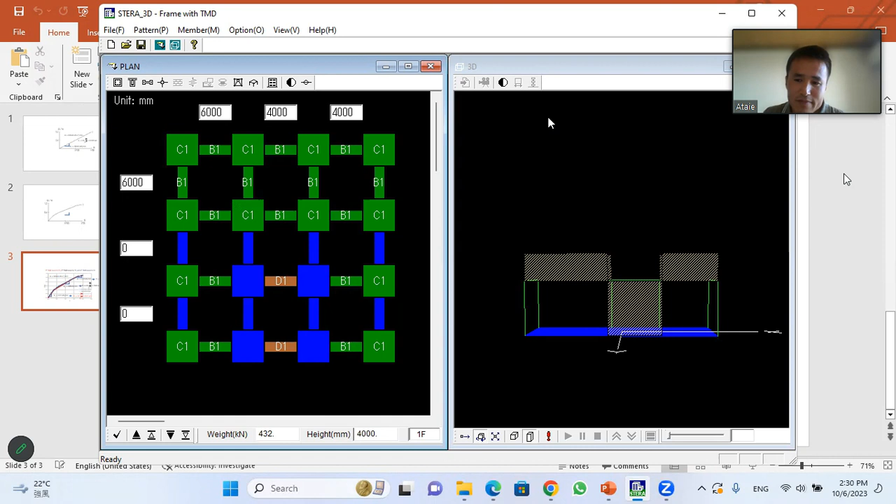Anyway, please design the building, and we can discuss later. Okay, sensei. I don't understand what you're talking about, so please show me. Okay, sensei. Thank you, sensei, and that's all.

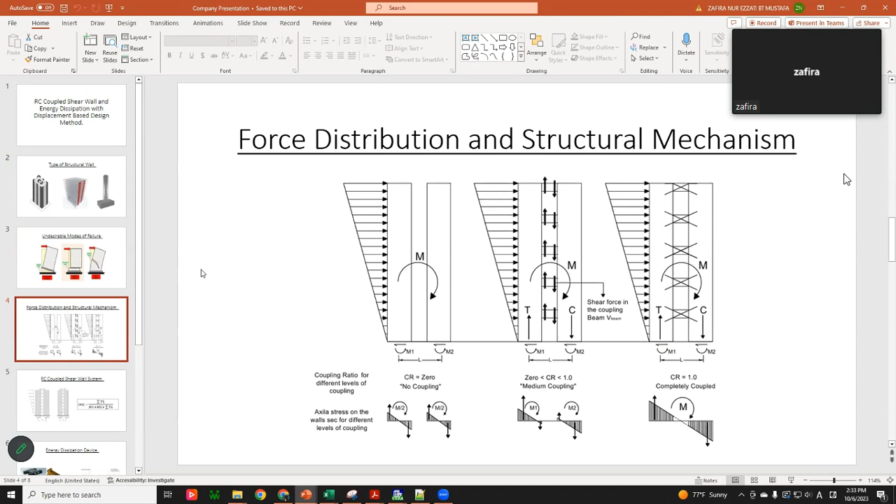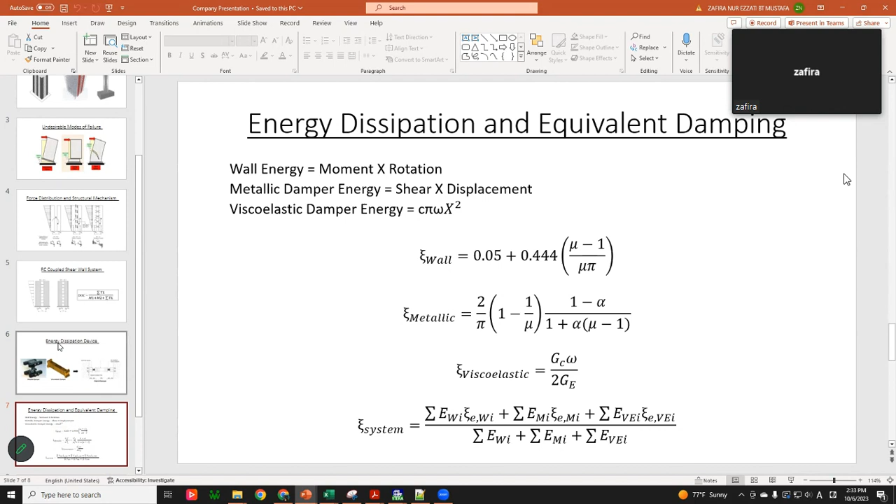Oh, not this one, sorry. So basically, I introduce what we are doing. We are doing a type of structural wall, they have different types, but we are focusing on coupled shear walls and the force distributions, and then how we determine the performance of the coupled shear wall system, and then a type of device we apply to the building to dissipate energy to improve performance. And then this is the formula we use to calculate the equivalent damping, and then the research objective.

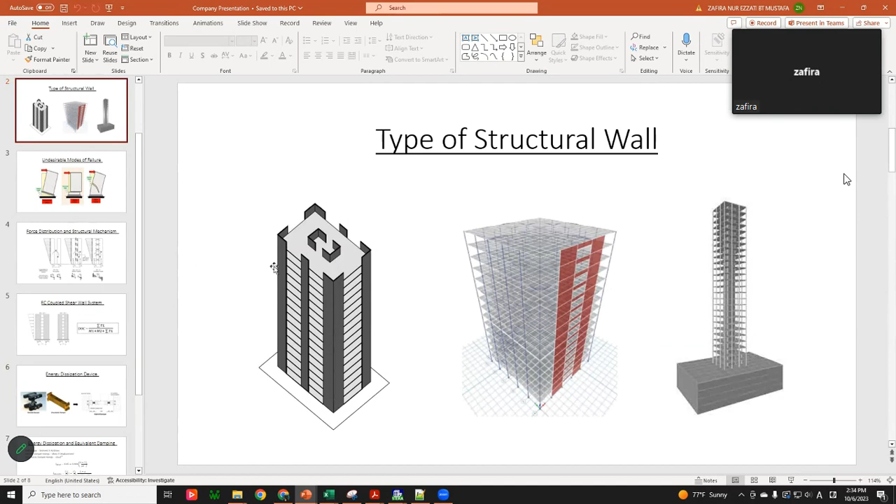So could you prepare more information about the viscoelastic damper, this damper's characteristics, the size and what material, and the limit deformation we discussed before. Yes sir, okay. I think we try to ask Sumitomo Riko Company to produce the viscoelastic damper, so they want to know more about this device. Okay sensei.